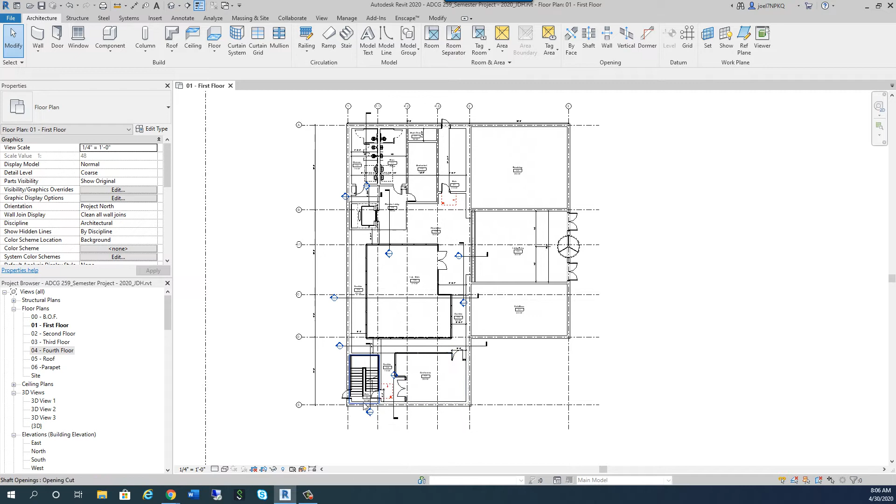Okay, so obviously when we look at this stair tower, which is the smaller of the two, obviously this is a much larger one. This one is really small, right? Not really small, but this one is not going to work for us. We need to build a new one because, based on egress rules, we can't open a door and walk right into a stair. Okay, so let's kill this stair.

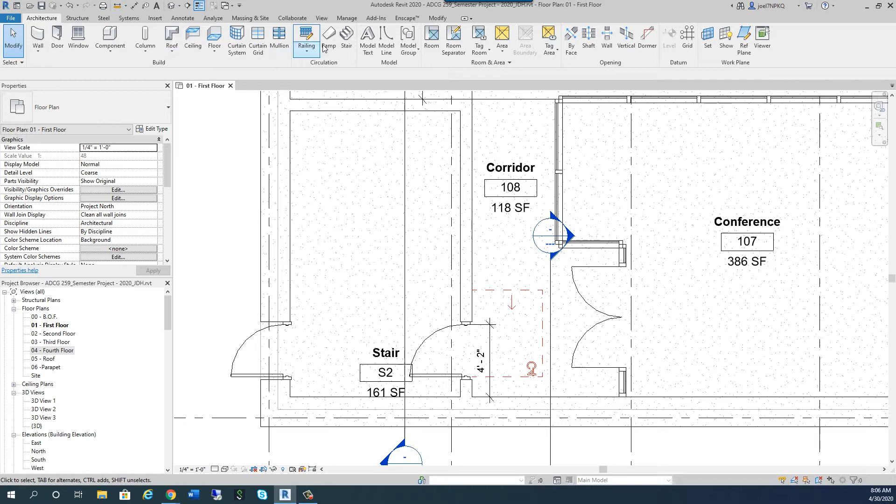Let's just delete it and we're going to build a new one. Here's how we're going to build it. We're going to go over to Architecture, and we're going to go to Stair. Under Stair, it's the assembled stair, the 7 max riser, and 11-inch tread. That's a pretty common one. For right now, we're going to just go from the first floor to the second floor. It tells us the number of risers we need, the tread depth.

What we're going to have to do is make sure that there's enough room so that when this door opens, someone could easily pass and go right through. So I'm going to just start drawing my stair right here. I'm just going to pick a spot for right now. And it tells me that there's 4 risers created, 18 remaining.

What I know about my stairs, first of all, the actual run width it's showing right now is 3 foot. But I know for a fact that's got to be 4 foot for this building that we're in. So before I even start, I'm going to come in here and say I want this to be 4 foot. And if the stair has to be 4 foot, then the landing has to be at least that size.

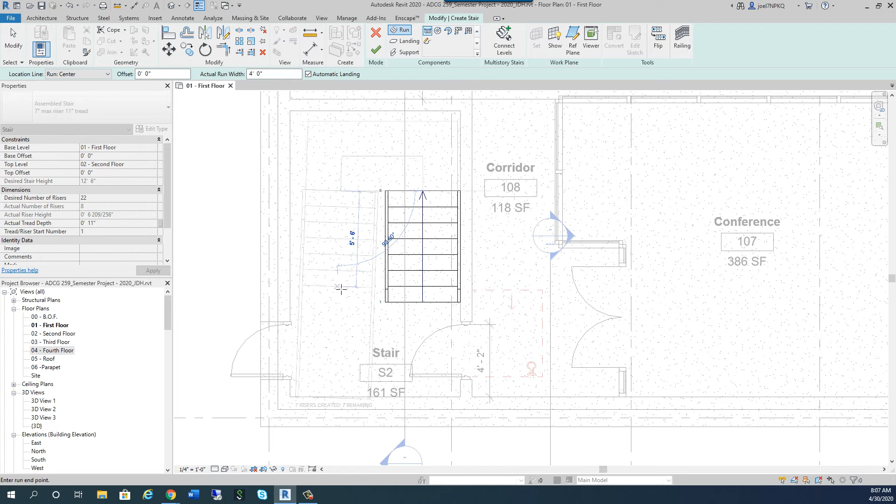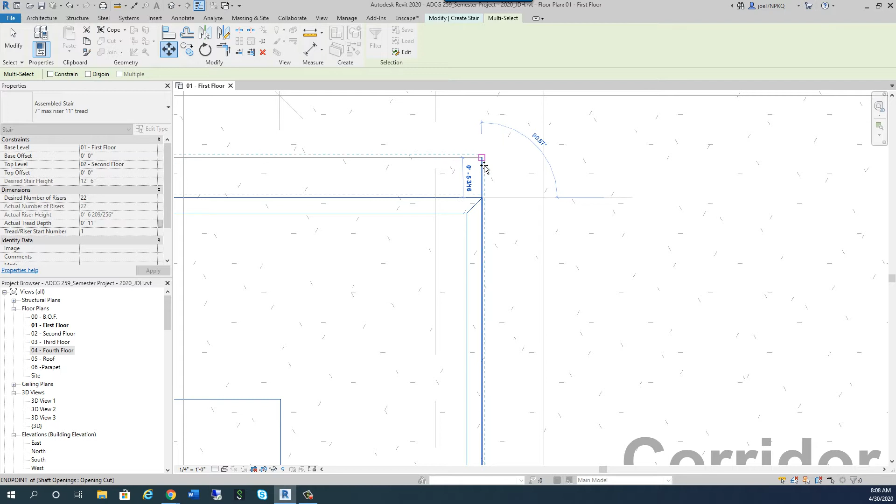So again, I'm going to come in here. I'm going to put 7, maybe 8 risers here, and then the rest of the risers are going to go just like that. All right, there's my stair. It generates the landing for me. I'm going to draw a window around that and zoom in. I'm going to make sure I move this right up into this corner and snap to that end right there. All right, so there's my stair.

Now, you might be thinking, well, Joel, it's not touching the other wall, right? Can't we make that landing wider? Well, sure we can. We can make it fit. So if I click on that, I can stretch that to there, and I can do the same with the stair as well. Whoops, I should have done them together. I'm sorry, let me back that up for a minute. Line to here. Okay, so there's our landing now.

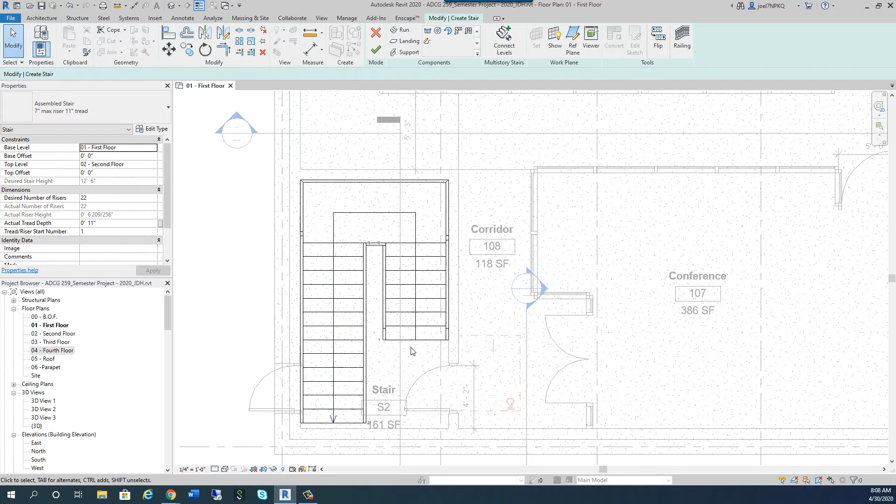And obviously this can be here because this stair, if we were to look at a section right now, is above it. But the question is, do we have enough space in here? And the answer is yes. If we look at this dimension here, we have 5'10½". And really what we need is the width of the stair. And there's some other rules that I'm not going to hold you guys to in this because we didn't have enough time to cover them.

But if you were to look in your textbook, and I'll grab mine right quick, stairs are in chapter 35. So let me open that up briefly. I'm going to pause the video while I do that. So what we discovered from the textbook is that we needed 48 inches in here, and we have that, because the minimum's 44, but for an enclosed exit stair like we have, we want to be at 48.

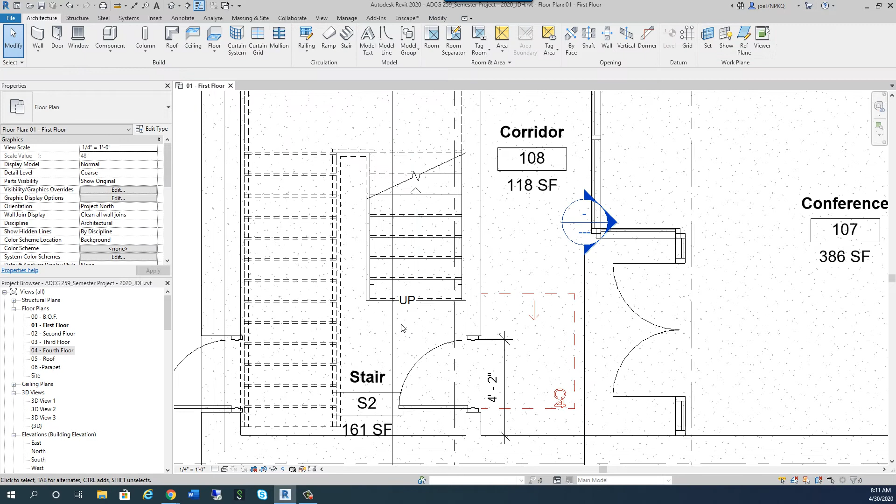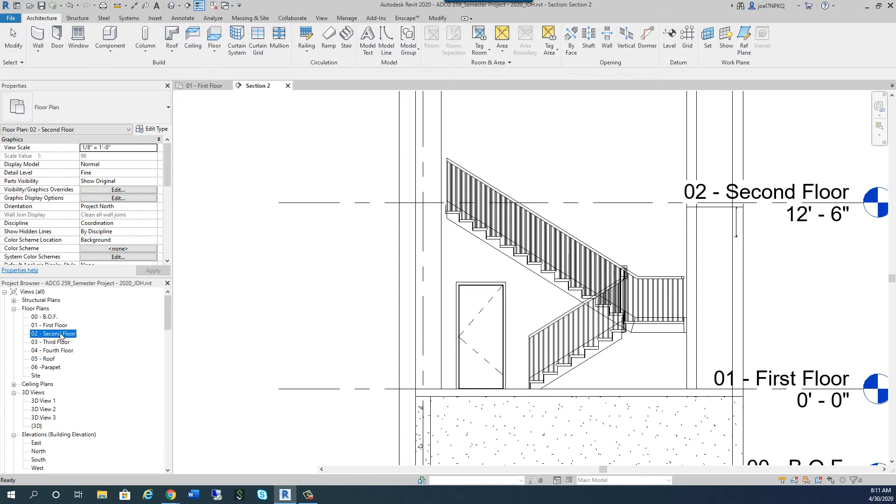So I'm going to just hit finish. I'm going to let the stair generate, and then I'm going to look at a section through my stair. I'm going to right click and go to view. So there's my stair, coming from the first floor to the second floor. And if I look at the second floor, there's my stair. If I put it on hidden line, there's my stair going down. So if it's just coming up this way and letting people off here, I'm going to need another set of stairs going up through the rest of the floors.

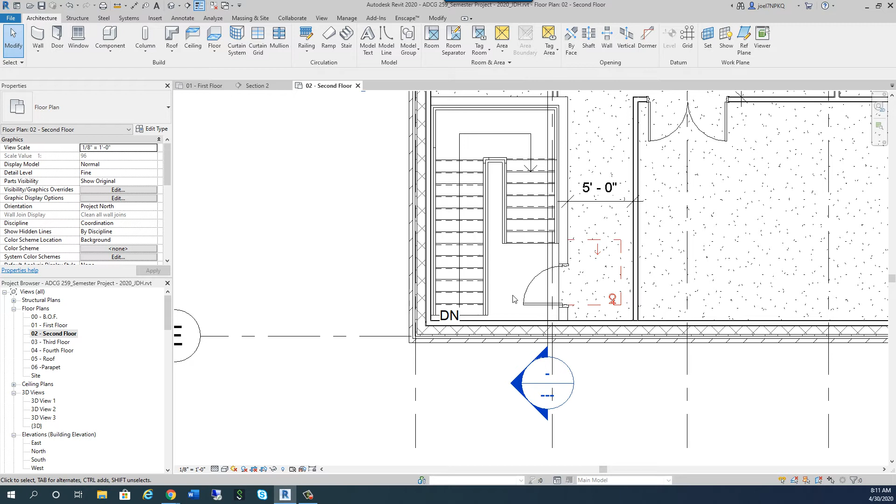So how would I generate that? Well, one of the easiest ways to do that is to use the multi-story stair function. It's been around for quite a while now, but it's gotten better and better over the years. Sometimes it still gives you a little trouble if you don't build your stair right, but let's take a look at it. And let's take a look at one other thing before we do that.

Under this stair, we have to have at least 80 inches. Now, if our door is 84 inches, we know we're clear. So we're completely okay. We've got enough room to go through this door and exit through this door. If I was in here on the first level and the fire alarm went off, I could leave this room, go in this door, and right out this door, and I'd be absolutely fine. So we're clear on that. We've got the 80 inches we need, even if we had to go beneath that stair, which we don't.

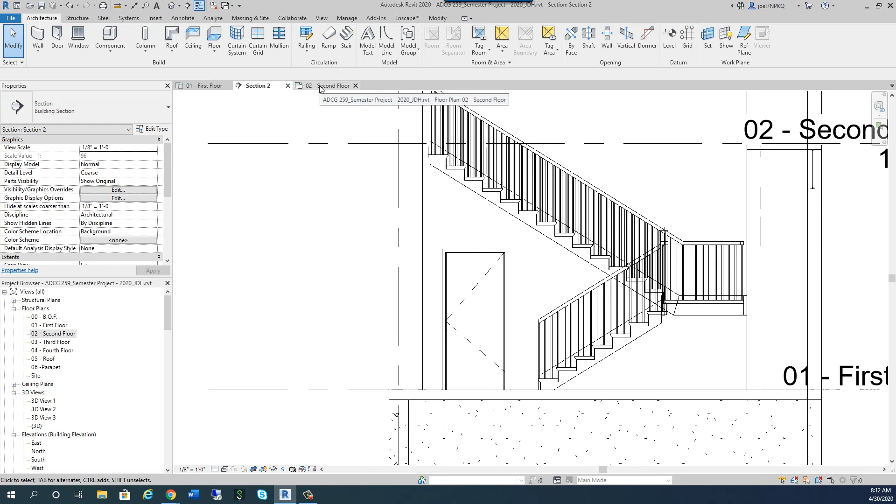Okay, so let's go back here and click on our stair, and you see as soon as we click on it, we get this function to edit or to get multi-story stairs. So I'm going to click select levels, and now it's showing me the options I have. I can go to the 3rd floor and the 4th floor, and I can click generate, and it should generate these stairs properly for me.

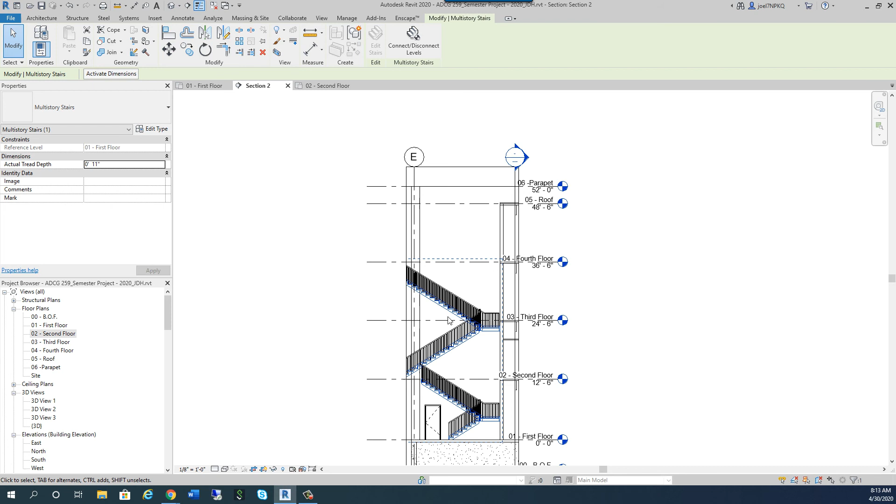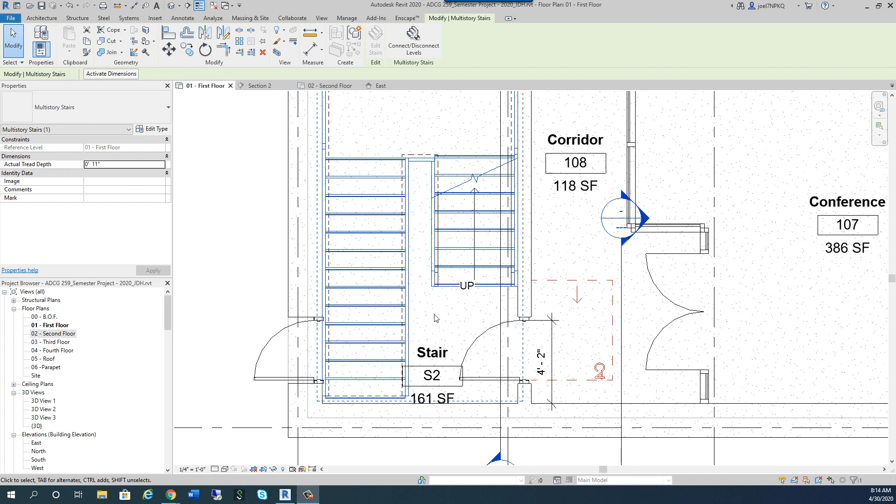Looks like I have a little bit of a problem though. Let me go back to the 2nd floor. Yeah, it looks a little off there. Not sure what's going on. Let me pause the video for just a moment. So what I'm going to do is, while you're drawing the first set of stairs, I'm going to figure out why the multi-story stair function went wrong on me there, clean that up, and we'll take care of that in the next video.